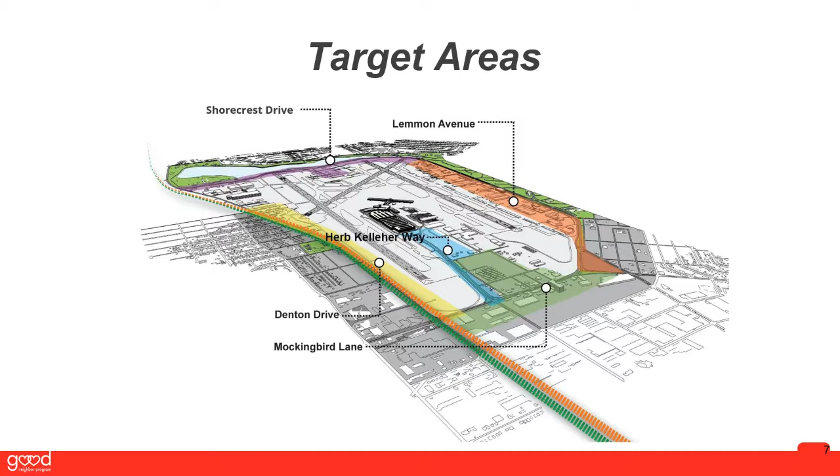I'm going to provide some updates on some of our infrastructure and development projects. We will be starting with the Entry Road Enhancement Project. This is one that is most noticeable as the work has been ongoing for quite some time. We started it back last year, and it includes, as many people have already seen, the installed art placed at the entry of the airport, along with enhancements to our sidewalks and lighting.

The Lovebird was actually installed back in October, and many people have already been able to come out and see that. We're very excited to see that as part of our larger art program, and it'll be highlighted along with the other sculptures we have throughout the airport. We've also started installing the new street lights depicted in this graphic with the red beacons at the top that you can see here. So as you drive in on Herb Kelleher Way, you can now see those as well.

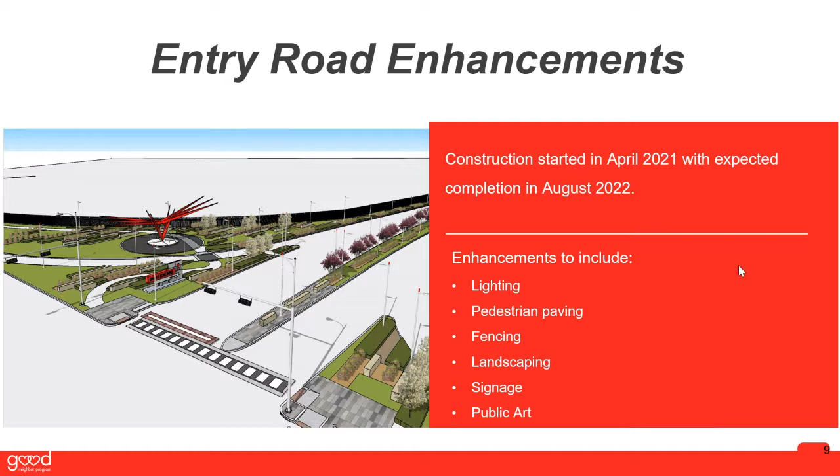Next slide. So in this slide, you can see some photos of some of the completed work. This includes the DART bus stops with the installed pavers, and this is again a photo of the art that was placed at the entry of the airport. Next slide, Ross.

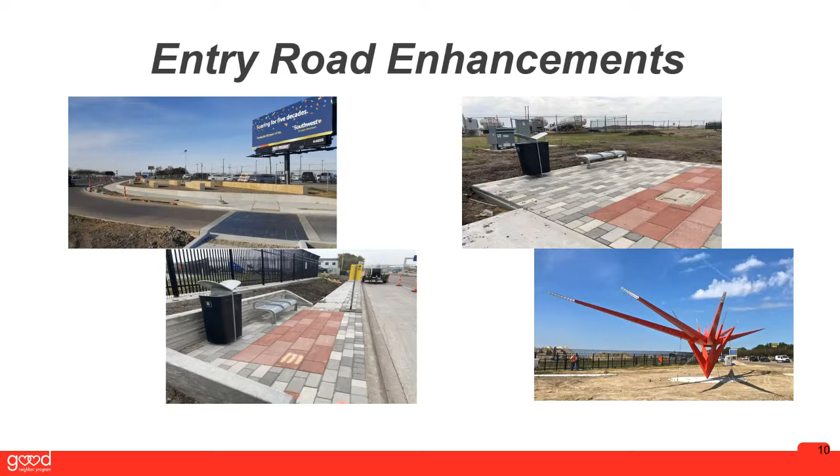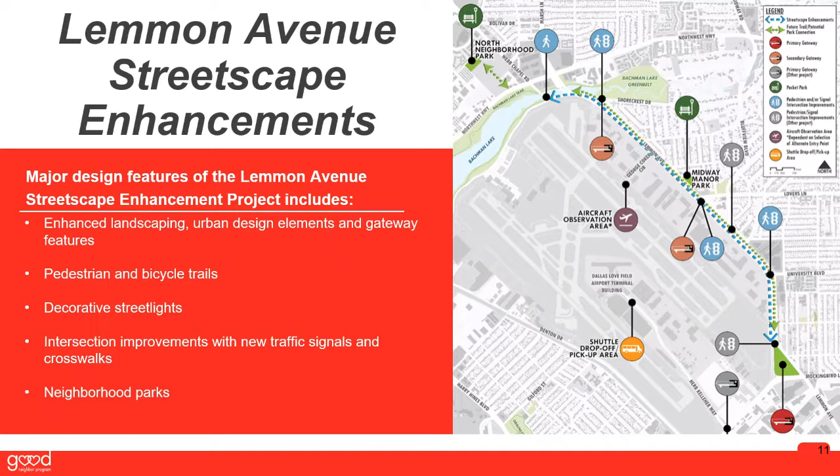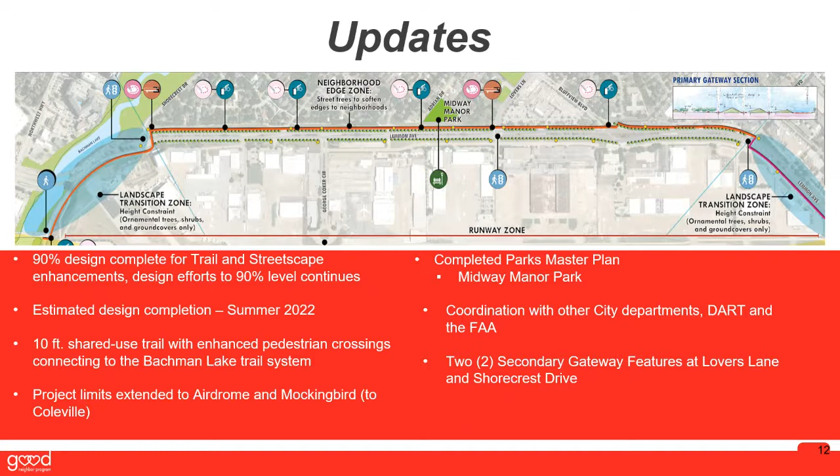Okay, so our next project is the Lemmon Avenue Streetscape Enhancement Project. This is one that's been in design. We're working with the FAA to sort out some of the details regarding the proposed design. It's currently at 90%, and we expect to have it completed within the next couple of months. This project is going to include different enhancements for the sidewalk and bicycle paths, a mixed-use trail, additional landscaping and lighting improvements, and a pocket park at Midway Manor with gateway features. Our goal with this project is also to improve and enhance safety in the area with the additional lighting.

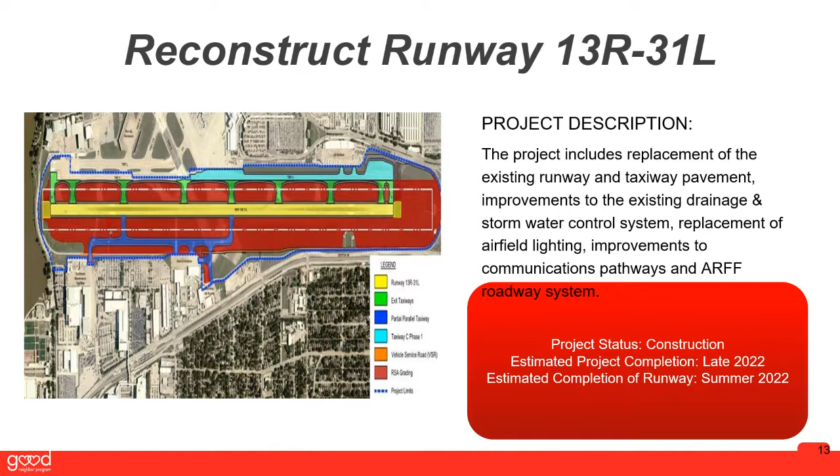Okay, so our ongoing project, the runway reconstruction, located on the Denton side of the airport, started in 2021 as well. It was originally expected to take 10 months, but we've experienced several delays, as have other construction projects throughout the industry. We are now anticipating the runway to reopen in late June. The general contractor is still experiencing some supply chain issues with labor shortages and getting equipment and material in, but we're working through that with them. These issues have also been felt throughout the North Texas area and other areas, as shortages can impact supply and demand. The overall completion of the runway is expected to be done by the end of October. Next slide.

Aircraft operations shifted all operations to the Lemmon side, the east side of the airport. Once this runway is back in place, they will be returning back to the Denton side of the airport as well. The overall project is about 56% complete, and the runway is about 71% complete. In March, we were able to open taxiway Tango 5 and Charlie 7.

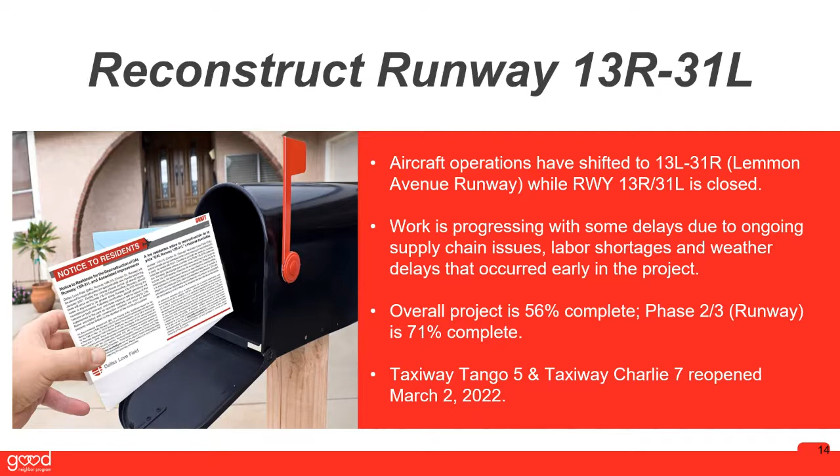These are a couple of photos of the reconstruction project. On the left side, you see a view that's closer to Bachman Lake of the runway. On the right side, the view is a little more zoomed in and focusing more on the Mockingbird side. You can see the progress being made on this project, so we're very excited about that.

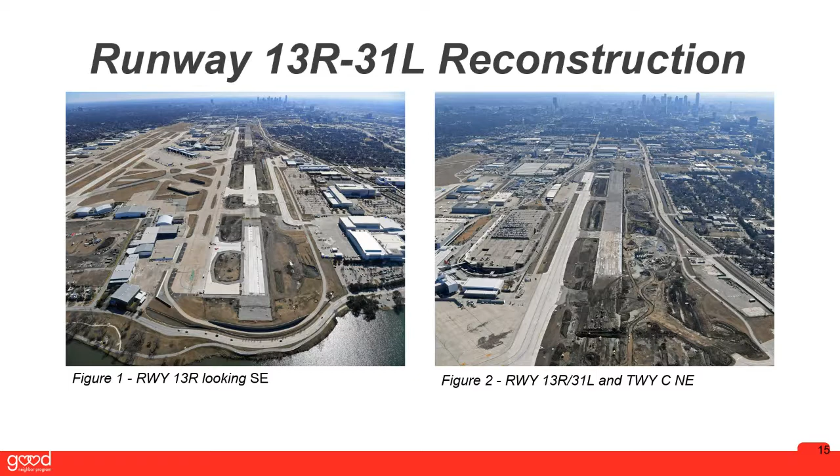In these photos, you can see the new taxiways that opened. They're now being used for both general aviation traffic as well as commercial use, and they are currently allowing aircraft to access the 13 left, 31 right runway. In the future, they'll also be able to access 13 right, 31 left, which is the Denton side.

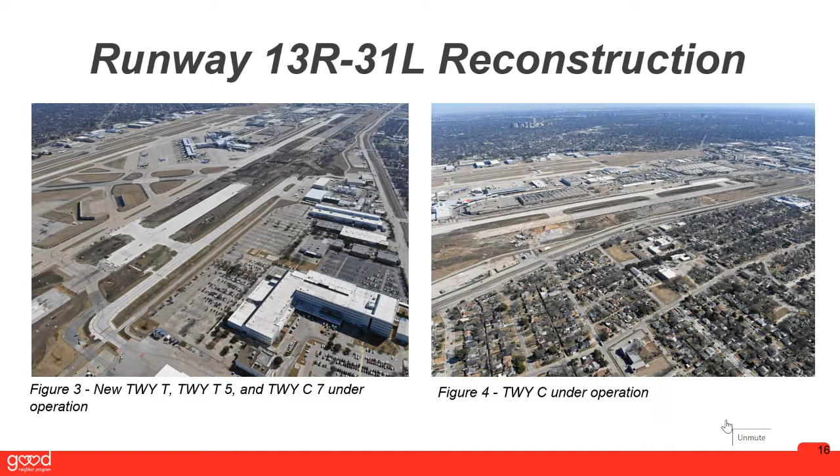This is a depiction of the progress being made on the runway. The area in green has already had the traffic switch completed, so they're currently being used. The area in pink is what's still closed for construction.

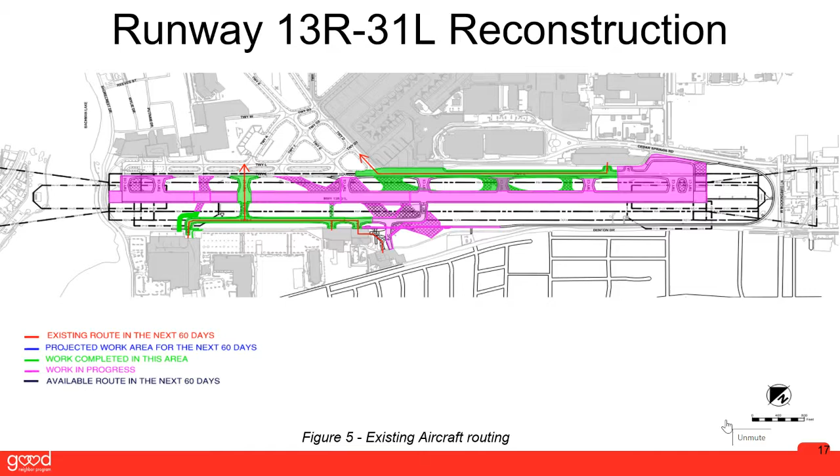These are the final photos of the runway reconstruction. On this project, we're actually applying it in 2 layers. We pave with 306 concrete, and then reinforce it with the 501 pavement. We are 90% done with 306 on the total project, and we're working our way through 501.

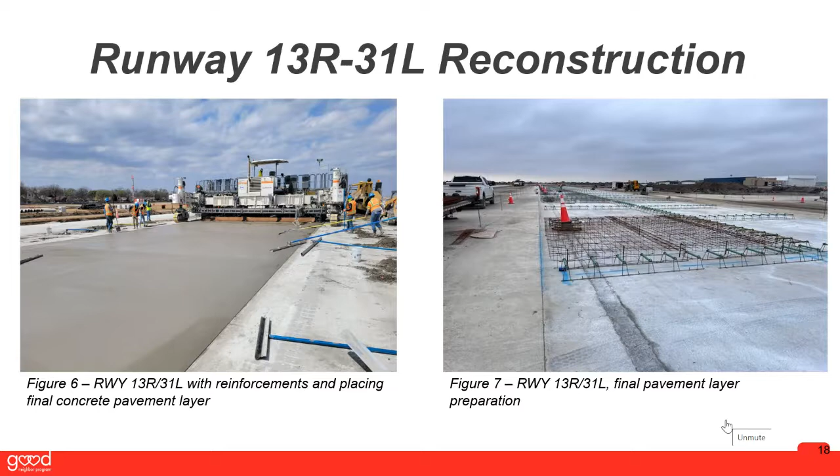Crossfields will be our next airside project, starting right after the runway project. This project will allow us to connect our taxiways, and it will also provide additional remain-overnight areas as well as additional de-icing. The design has already been completed. The bids were opened for construction in March and are currently being reviewed. We expect construction to start in August, and this project will not impact runway operations.

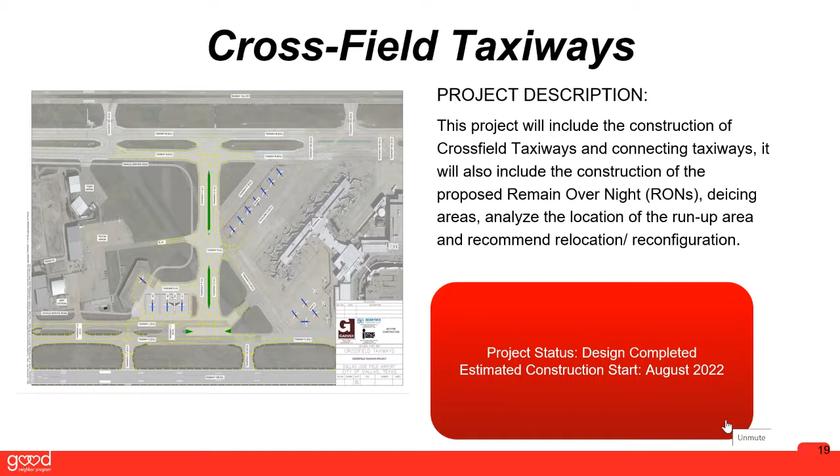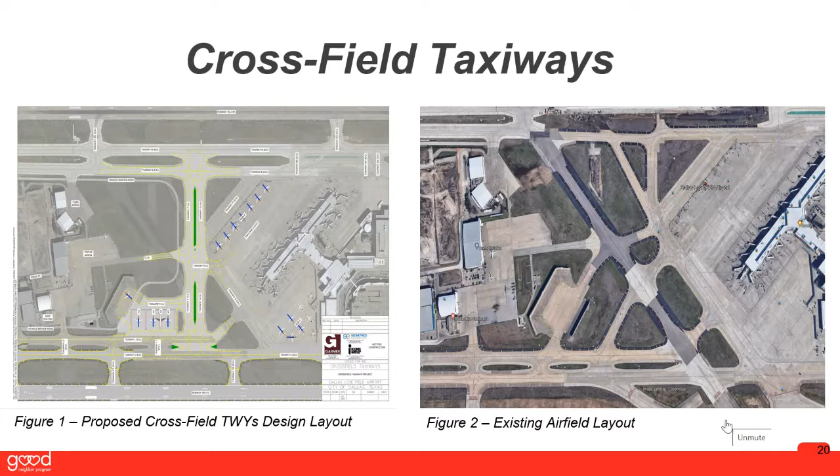Okay, next slide, please.

One of our other projects currently being worked on is the alternate entry, which has actually been in the making for a couple of years. The alternate entry is a result of the 2018 master plan, where it was reviewed and found that there were several areas that could be considered an issue with only having one entry. If there are any incidents on Herb Kelleher Way, whether traffic or safety incidents, those could produce a backup or impact availability for first responders to access the airport. Additionally, it could burden passengers if we had to shut down Herb Kelleher for any reason. So the alternate entry study was started to evaluate those issues and determine the alternatives.

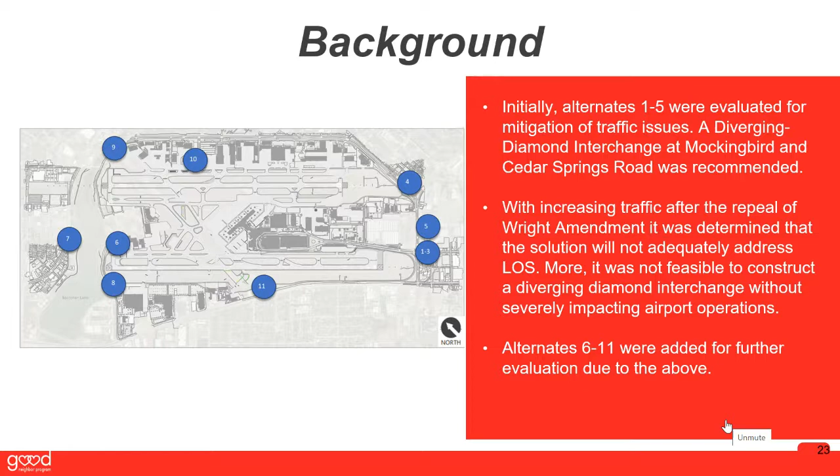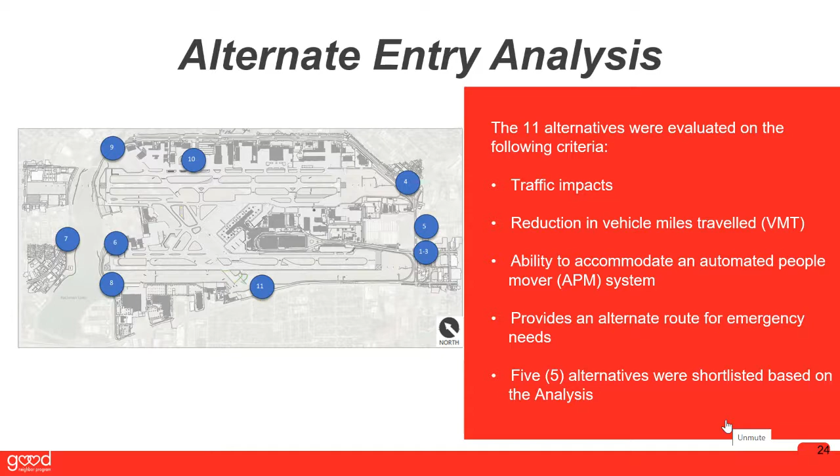So those 5 alternatives were expanded to an additional 6, which here you can see the layout of those different alternatives and the areas that they were able to address or not address. From this, you can see that 5 of them were shortlisted.

This chart shows the availability for the north entry alternatives being able to address the majority of those issues.

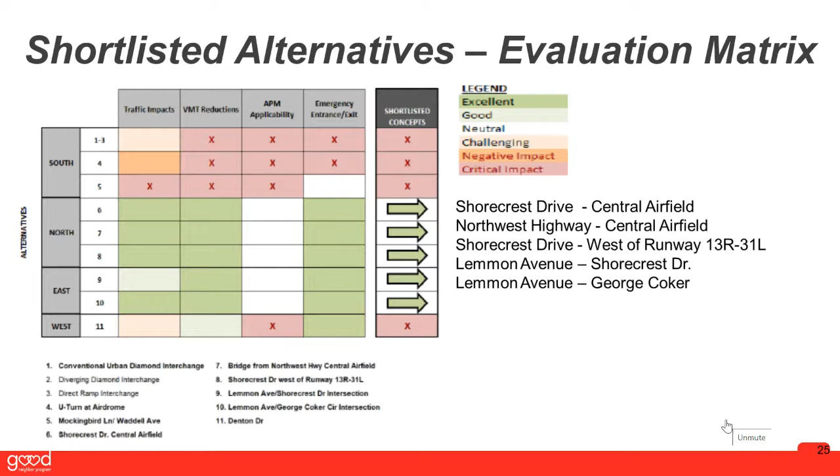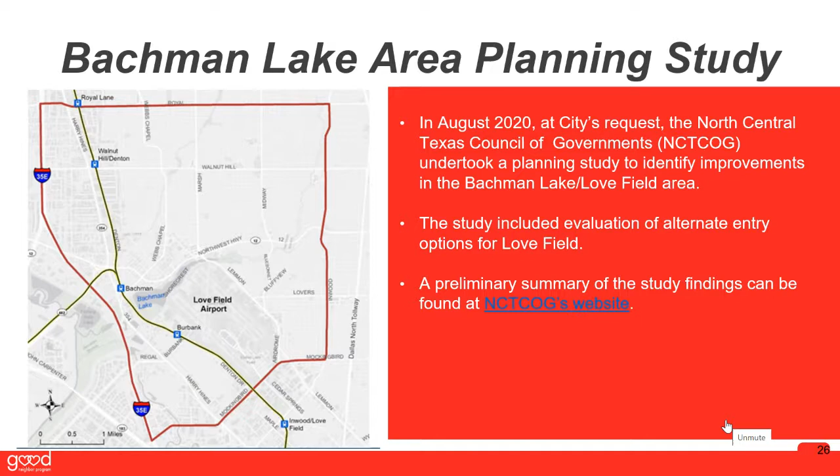So in 2020, at the city's request, we did work with North Central Texas COG and requested a study, which they have undertaken. We are currently still waiting for the results of their study, but you can access the preliminary findings on COG's website.

So the next steps will be once COG actually presents their findings and their recommendations to council, the Department of Aviation will then come in and present our alternatives as well. And then we will ask council to provide direction on the next steps.

And I will turn it back to Roz and our other partners to provide the environmental updates.